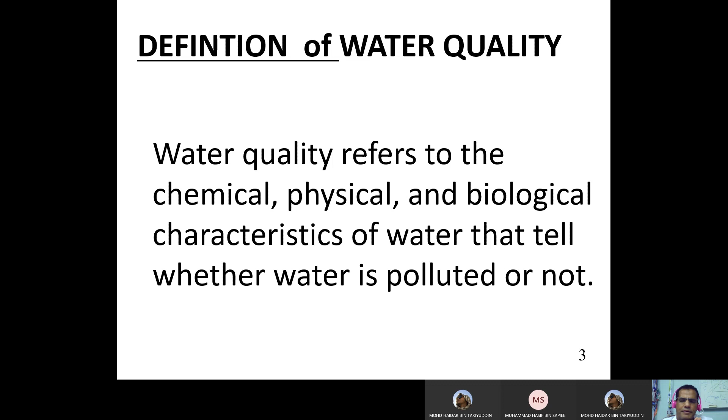So maybe we need nanofiltration, we need membrane, and if we have toxic metals maybe we can use activated carbon or membrane, or at home we have something called RO, a machine with 3 or 4 cartridges, a filter at home for drinking water.

Do you have a machine at home for drinking water? Yes, that machine, Coway. So that machine will have 3 or 4 filters. One is to remove chlorine. Second, to remove heavy metals. And there is one more for bacteria and viruses. Now we have COVID-19, a virus, so it must be clean, otherwise there will be a problem. And finally there is something called RO, reverse osmosis, so that you get very clean water.

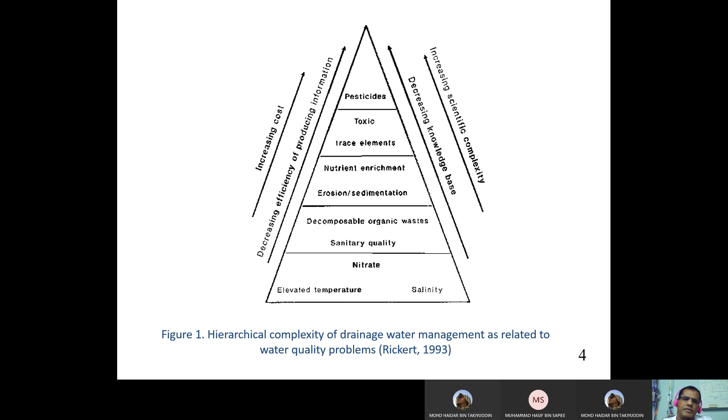All right, we go to the next slide, what kind of parameters of water quality we have? We have different parameters. I will just read the title and you can read by yourself, because this is theory. If you have any question, you can ask through WhatsApp or through our team meeting, or also by telephone, direct contact. You can contact me anytime.

No problem, inshallah. So water temperature is very important because when you release water to the open environment, we have to consider temperature. Conductivity means ability to pass electrical current, it means how many salts we have, dissolved ions.

For dissolved oxygen, this is very important in marine life. For example, if dissolved oxygen in seawater is very low, it makes plankton and fish die because there is not too much oxygen. Why did it become like that? Because sometimes if we have contaminants, we dispose them to the sea and they contain high nutrients. Bacteria eat those nutrients, and when bacteria eat them, it consumes all the oxygen in the water. Once all the oxygen is consumed, there is none left.

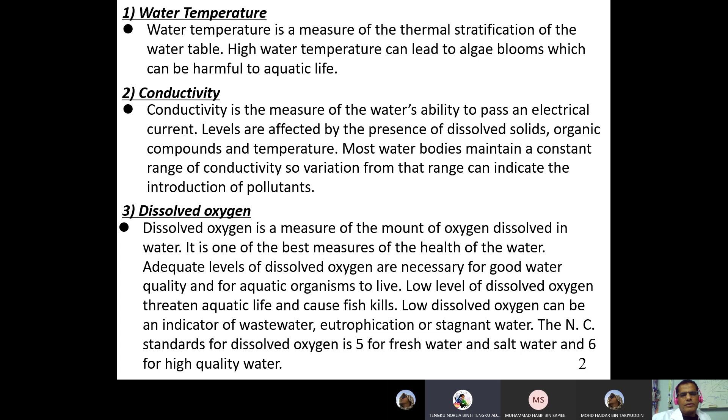Okay, so about dissolved oxygen, it is very important in marine life. We go to the next slide about total suspended solids.

Total suspended solids gives a measure of turbidity. Do you know what turbidity means? For example, after rain comes, then the water becomes brown color. That is not because of the water itself, but because there is silt, because there is clay. So this makes turbidity. So for drinking it's not good, but maybe for irrigation there's no problem.

For total organic carbon, for example, if we go to an industrial area, like their main business is oil and gas, there is waste. This waste, of course, they treat before they dispose of it. Most of this waste contains hydrocarbons. If there is no treatment, these hydrocarbons go to the sea, then bacteria consume these hydrocarbons.

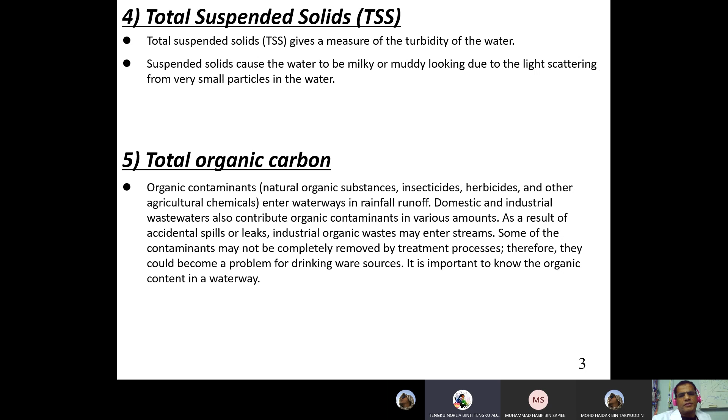We go to the next slide: biochemical oxygen demand. This you can read, but it's an indication of how many bacteria or microorganisms are in the waste. Usually the food industry contains high BOD, or biological/biochemical oxygen demand.

For nitrogen, ammonia, nitrate - this usually comes from waste from fertilizers, from irrigation, from farms, cows, sheep, whatever. This produces too much nitrogen and ammonia, and this promotes the growth of algae. Once algae grows, it becomes a bit of a problem. Algae is very good if it's at the sea bottom because it produces oxygen, but in other areas it's not good because it makes pollution.

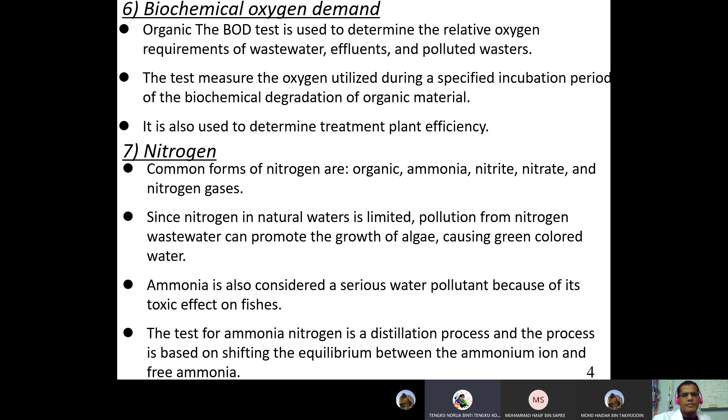Why? Where must it go? Waste treatment - centralized utilities, the wastewater treatment plant. We call it the wastewater treatment plant.

So in this wastewater treatment plant, it starts with screening. What does screening do? Big particles like stone, bottles, plastic bags - all this will be taken by screening. Screening is like a big filter - not a small filter, a big filter - because I want to take stones, drinking water bottles, oil bottles, all this big-scale material. We call it screening.

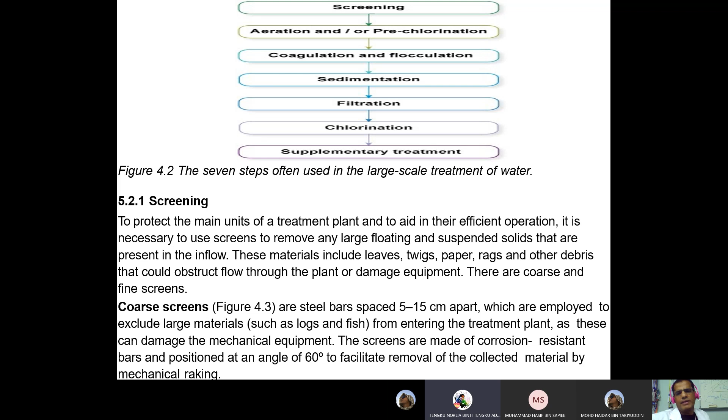Like here, the Middle East, sir? Like Middle East, yeah, maybe in Africa, in the Middle East, some countries, yeah, that's right.

Why does the water taste like salt? Where, at Madinah? Maybe because there's too much salt. In Malaysia you see very clean water, right? Madina, your country is... No, my country is Yemen, not Medina. But I was there. I know what you mean.

Like for example, Zamzam also. Zamzam, Rasulullah said it is for what you drink. For example, if you are sick, you will be recovered. When you taste it, it is not very sweet, but it is like medicine. We consider it like medicine because it has too much nutrition. I think it's not only the bitterness, it comes from magnesium, too much magnesium there.

Where does the water supply come from? I think in Medina it comes from the sea. They do desalination, you know desalination? From seawater, they take the salt out, then mix this like distilled water, very clean. They mix it with underground water again.

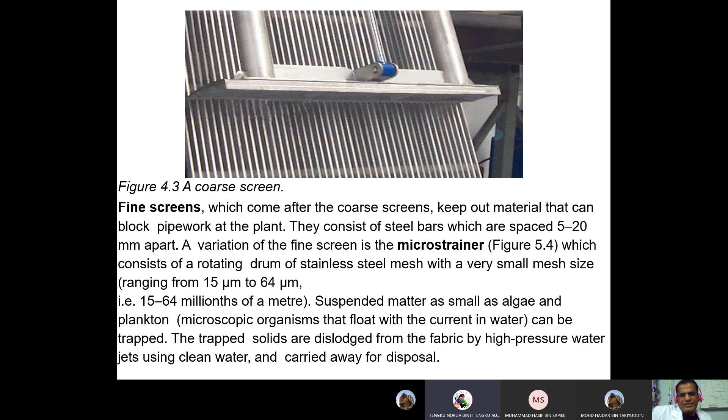This is why if you have mineral water and plain drinking water, you notice that mineral water is not sweet like plain water at all, right? Plain water is sweeter, mineral water feels more fresh, you feel 'payau', because it has many minerals inside which are very important for our bodies, and the cost is a bit more expensive. But the taste, of course, plain drinking water is much sweeter. Am I right or wrong? Yes, that's right, Alhamdulillah.

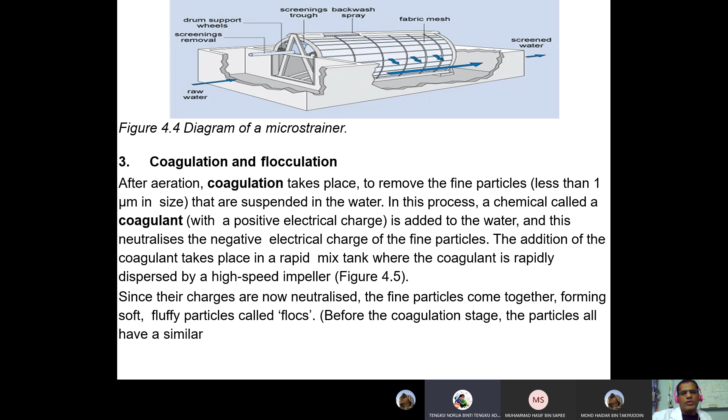So here I will leave this for you to read. Aeration, what is aeration? What is screening? What is coagulation and flocculation? I already explained, but I think you can read from here to understand more. If you have any difficulties, you can ask me anytime by telephone or WhatsApp, no problem, sedimentation here.

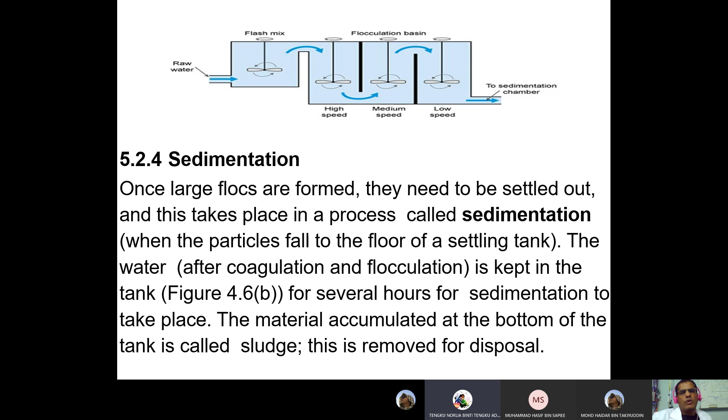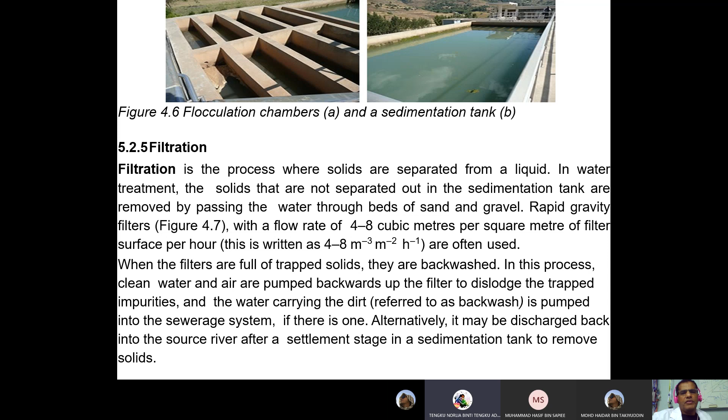This tank shows you how sedimentation occurs. And then finally, this is the big sedimentation tank here, you see how. The final station, and then you go to filtration, and after filtration we go to chlorination. Why? Wait, I want to go back.

Here chlorination, and then we go to supplementary treatment. I think fluorine also. So sometimes we need to add iodine or fluorine because it's somehow very important for our bodies.

As I mentioned earlier, before you came, Norlia, I explained that when we talk about heavy metals or toxic metals, we cannot say everything is toxic. There is a range. If more than this range, it will be toxic. If less than this, also not good for our health. So it should be in the range, a range between. This is okay, more is not good, less is not good.

In the middle, there is a range. If you see on the internet, WHO or Malaysian standards, there is a range. For example, cadmium, or we take arsenic. If in some countries it's 1 part per billion, a very small amount, or 1 part per million, it's considered to be toxic. But less than this, it is okay, it is allowable.

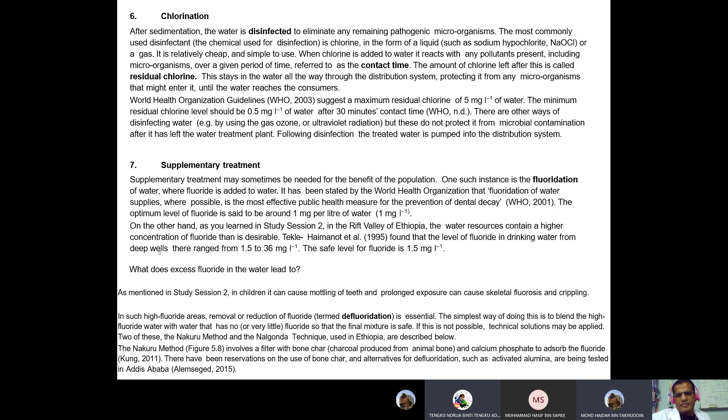For example, mercury, you know mercury? Mercury is very toxic. So if you have a very small amount, even part per billion, it is also considered to be very toxic.

Management of waste from water treatment plants. This waste after treatment, actually we have it, but I don't go into detail here because water supply in Malaysia is an elective course, it is MPU, we don't go for details.

But if we go, for example, to wastewater engineering, then we talk about preliminary treatment, primary treatment, secondary treatment, tertiary treatment. If we go for tertiary treatment, it means after we remove all contaminants and microorganisms, it can be used again for irrigation, for example.

So in your case, we just give you a very brief overview about treatment methods, but in other courses we go for details.

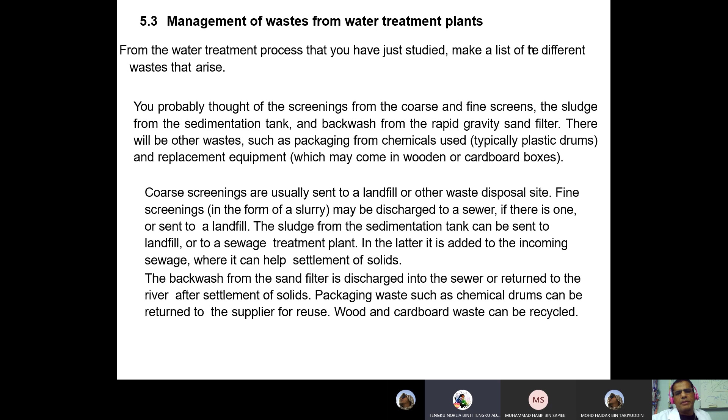Sustainability and resilience in water treatment, this is what we mean by sustainable. Your background is what, manufacturing or electric? Manufacturing, electronic.

Sustainability means how to keep resources in very good condition so that we can utilize and regenerate them. If we have resources, we utilize them in a very good way, and if we can get benefit from these resources, we recycle them again and continue using them. So we get the maximum benefit from these resources, this we call sustainability. Clear or not clear?

Clear. For example, we have water resources. If we make treatment in a very good way, then this water can be reused again, maybe not for drinking, but for irrigation, for industrial use. Maybe in cooling, for example, industrial cooling, if it's not mixed with material, then it can be used.

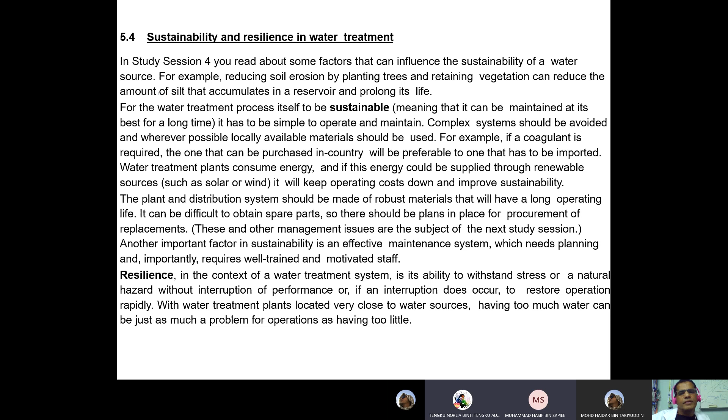For irrigation also, if it is free from microorganisms, heavy metals, and other waste, like nitrate, nitrite, or phosphate, this is considered also fertilizer. Even though it is waste, it can be good for plants. So sustainability means it can be maintained at its best for a long time.

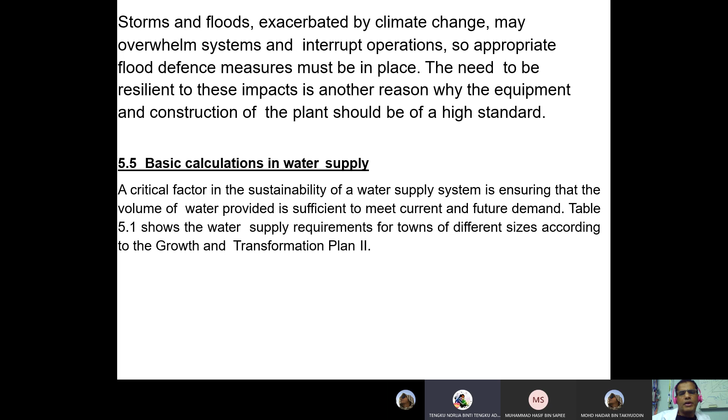Maybe I give you a basic, easy calculation how to calculate, for example, for one city like Chukai, how much water is needed per day. Okay, let's go for an easy example.

This depends on, for example, if we are in a big city, minimum water needed per day is 80 liters per person. If we are in the capital, for example Kuala Lumpur, maybe we need 100 liters per day for each person. For a medium town, around 50 liters. Small town, maybe 40 liters. This depends on the country. If you are in Malaysia, Europe, or the Middle East, it will be different.

It depends on the country, but WHO has standards. They say that, for example, 50 liters a day is needed per person on average. In Malaysia, I think we use more because the weather is very hot and water is very cheap compared to other countries, so we are utilizing too much water actually.

But it's good because of COVID-19, we need to wash our hands every time, right? We need to wash our clothes every time. We need to be cleaner, and this will help to remove COVID-19, inshallah.

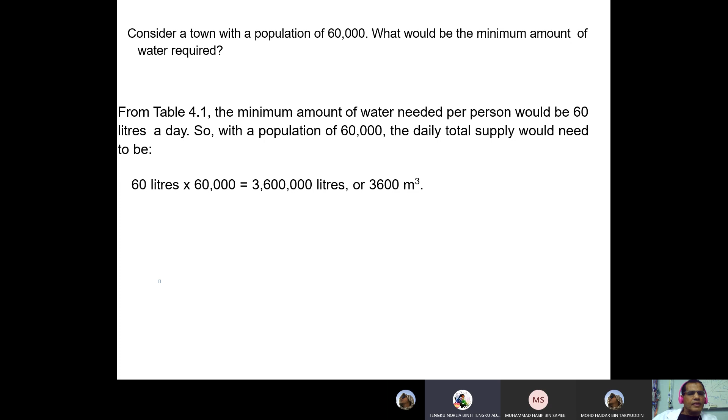Okay, this is one thing here. We are talking about normal people, but if we are talking about a school or hospital, do you think the water needed is the same or different? Different.

In hospital, is it different? Do you think it's the same as homes or do you need more? More, need more water, need more, that's right. So here, this table.

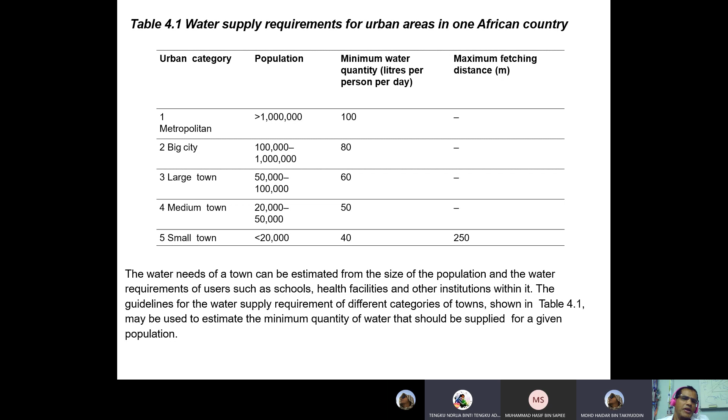This table shows how much water is needed. For example, if we are talking about a health center, it needs 135 liters per day for one person. If in the hospital, we need 340 because hospital patients are sick, so they need more care. This table is from WHO, sir.

Is it fixed? I cannot get your point. Is this table fixed for one person for health center or hospital, from WHO? Yeah, somehow it is recommended by WHO for each one.

If you are at home, we said it's from 60 to 100, right? But if we are talking about health center, hospital, school, office, or restaurant, it will be different. We can refer to this table.

So for example, now we give one example based on this table. If people want to build a hospital with a capacity of 1,000, how much water is needed for this hospital a day? It will not be like at our homes, it will be much higher. We need to calculate based on 340 liters per day for one person.

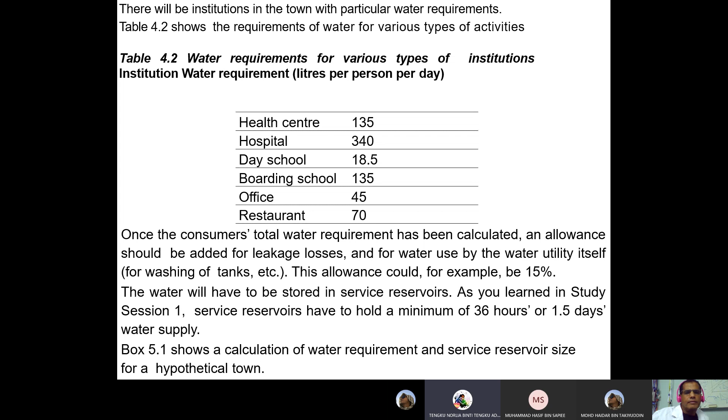Okay, let's go to see one example here. This is a very good example to make you understand. Here, water provision for a small town: imagine a town with a population of 5,000 people and a health center that treats 100 people a day.

The minimum water - what happens if there are more people than water?

More people than water, like in the Middle East, in our country, huh? You mean there is a shortage of water, like sometimes in Selangor? Not enough liters for consumption, like in Selangor sometimes, right? Yes, also Kelantan has a problem sometimes, in some areas.

Anyway, in this case, what we need is just to try to minimize the consumption. We have to take care of the consumption.

What happened? I cannot hear you, can you talk one more time? Yeah, Haidar. Hasif, yeah, Hasif. Okay, Hasif. Missing, hello yes, because we are talking both here. I listen, but okay, my line is slow sometimes.

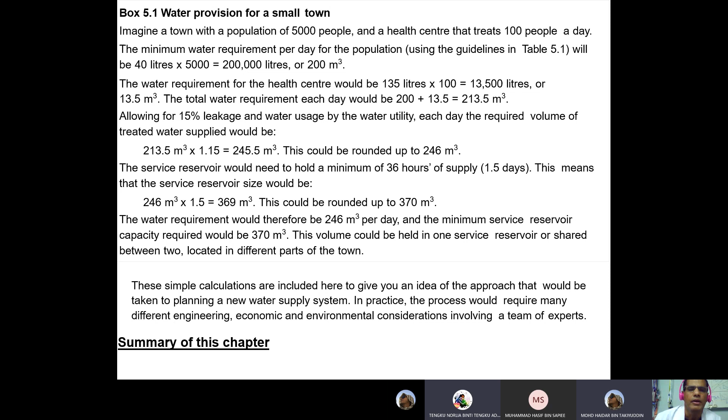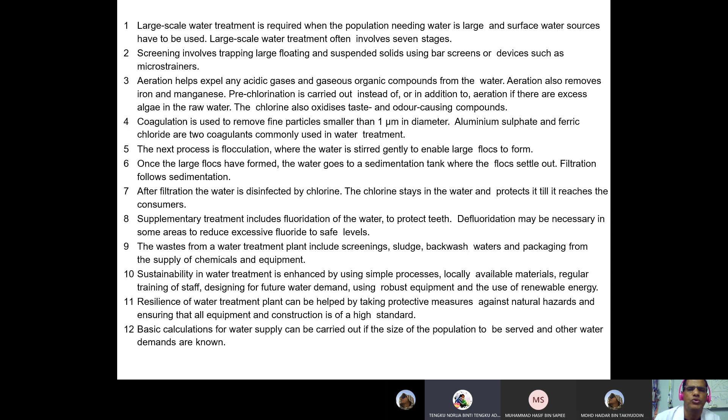Okay, next slide will be about some definitions. I will leave this one for you to read because this is theory, no problem.

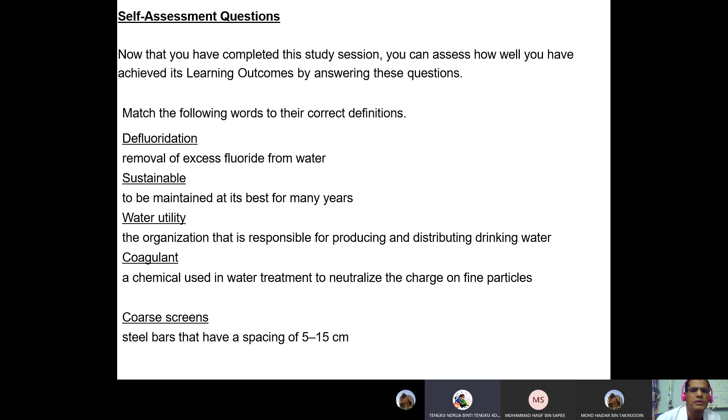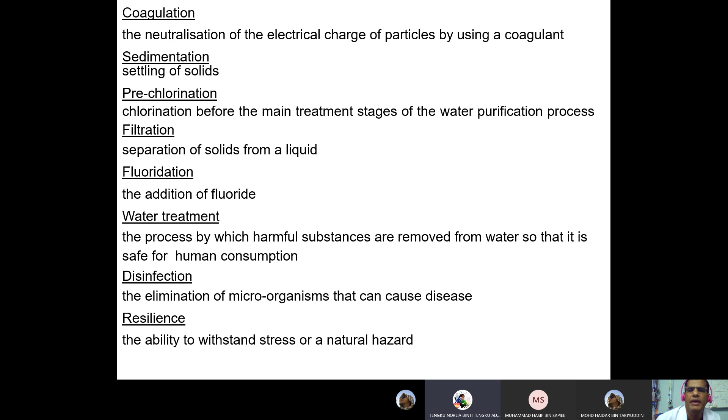So for this definition, for example, what is the meaning of defluoridation? What is the meaning of sustainable? What is the meaning of water utility? What is the meaning of coarse screen? Coagulant, coagulation, sedimentation, filtration. So there are many definitions. This you can memorize, it's very important for you to memorize.

20 questions, sir. Assignment will be questions, you answer the questions. No, I mean, how many questions for multiple choice? Maybe 50 or 60 something. Usually like that, MPU between 50 to 60, right?

You have taken MPU all subjects or no? Only objective, second, only yeah. How many, objective or multiple choice? It is multiple choice, will not be subjective, will be objective. You select only A or B or C or D, either one.

Alright, but it is very tricky, so be careful. Yes, of course I will show you before the exam comes. I will not give you the same, but similar, so you understand how. If you study, tricky lah sir. If you study the theory, inshallah no problem at all.

Okay, all topics ah? All topics, masuk lah. Final will be all topics because we have to include all. But for your information, read more.

The mini project will have too much marks, so try to spend more time with the mini project, in writing and also in presentation. When you present, I assume that I don't know anything, so you explain to me from A to Z. And take a topic that you like, I don't force you to take anything you don't like.

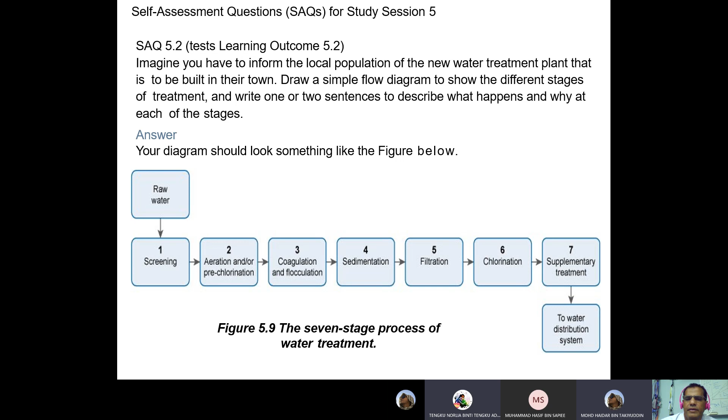Here, this is the seven procedures for how to clean water. Raw water coming, go for screening, aeration, coagulation, sedimentation, finally supplementary. I think this is the definition, step 1, step 2, step 3, step 4.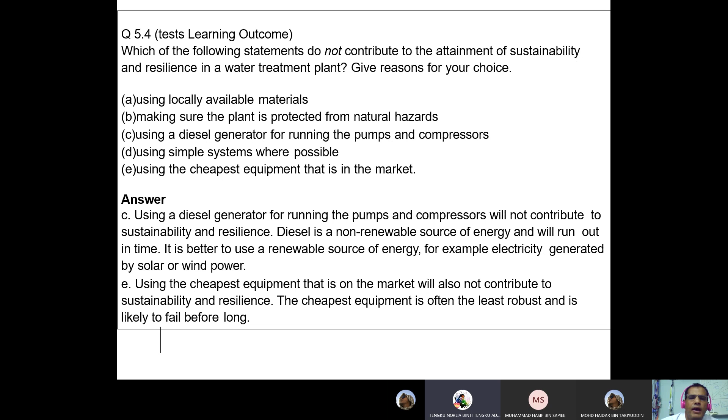And then finally, some questions to know if you understand or not, so you can read and see if it is logical or not. If you have a problem, you contact me. And then finally, Mr. Zul, someone asked him to recommend water supply capacity for a reservoir, how much is needed, and the answer is here also for you to read. You go step by step. If you have any problem, kalau ada masalah, you contact me, no problem.

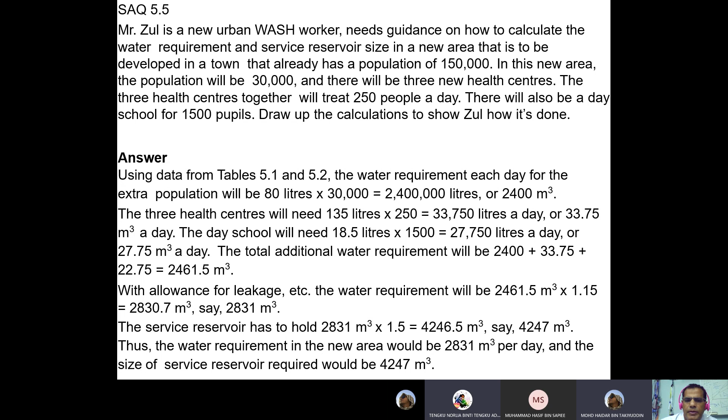Okay, and then this is the end of chapter 4. Hopefully everything is okay and you understand about chapter 4. If you have any question, I will receive your question. Any question from chapter 1, chapter 2, chapter 3, chapter 4, any question about those 4 chapters you can ask.

Sir, about the mini project, yeah.

We can elaborate from the water using in Kerteh also. In Kerteh, for example, treatment of waste from Kerteh, and then you go for that. From the utility plant, can, no problem. It's very good.

Start from the raw water, come and we process the water.

Friend is calling, okay let me answer. Assalamualaikum. Waalaikumsalam. Selamat Hari Raya. Merry... morning, Hakim, you going back to work?